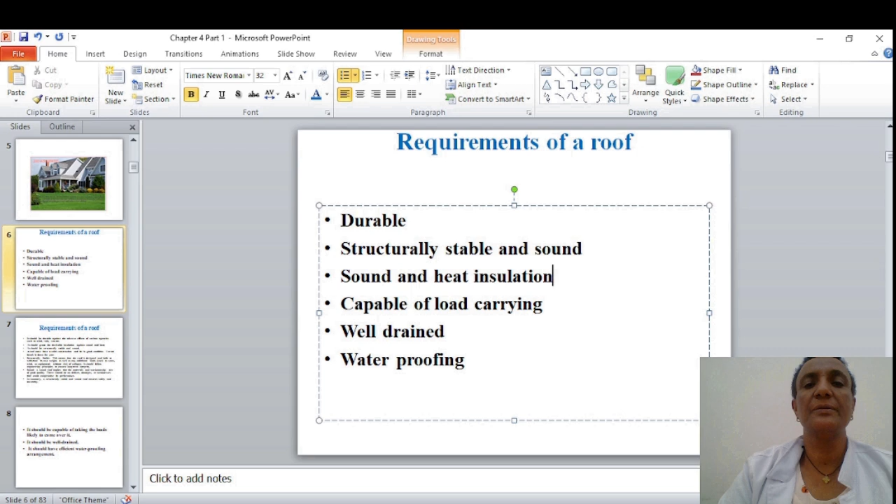Structurally stable means a roof is designed and built to withstand its own weight and other additional loads such as live loads, dead loads, and other loads. And it should follow engineering principles to ensure long life integrity. There should be no defect or weakness to compromise its performance. It ensures safety and durability.

Another requirement is sound and heat insulation. Sound and heat insulation plays an important role in roof construction, ensuring comfort, energy efficiency, and noise reduction. Let's explain in detail. Sound insulation. Sound insulation aims to control sound by blocking and interfering with sound waves.

Commonly used materials for sound insulation are first mineral wool. It is effective for both sound and thermal properties. The next is fiberglass, which is widely used and affordable. The third material is foam. It offers good sound absorption. Now we will see the benefits of sound insulation.

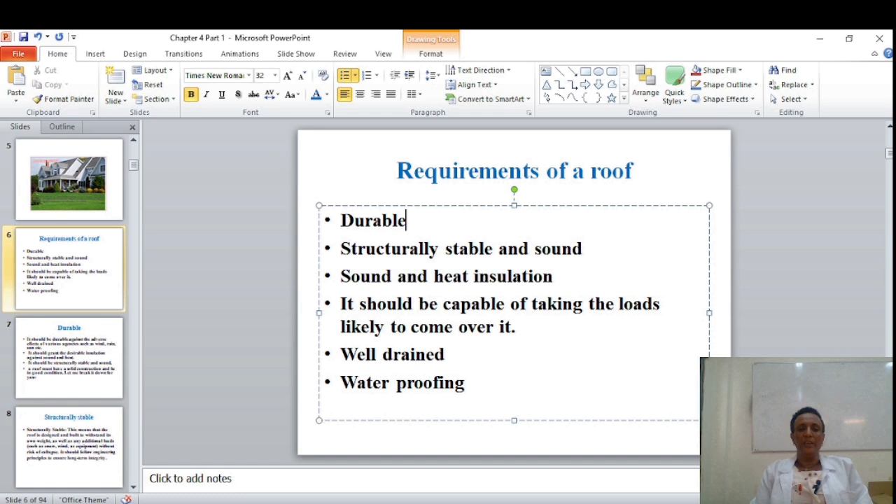Sound insulation reduces noise because insulation creates a barrier preventing sound transfer between spaces. And energy efficiency, because insulation also resists heat flow, keeping your home warm in winter and cool in summer. Now we will see heat insulation. Heat insulation prevents heat transfer between the interior and exterior of the building.

Commonly used materials are batt insulation, blown-in fiberglass or cellulose, spray foam insulation, and mineral wool, which also prevents sound. There is an installation process for these materials. First, install these materials in ceilings, roofs, and walls to maintain comfortable indoor temperature. Now we will see benefits of this heat insulation.

The first benefit is energy saving. It reduces the need for additional heating and cooling mechanisms. The next benefit is comfort: consistent indoor temperature all over the year. Remember, choosing the right material based on your needs and budget is necessary.

The next requirement is the roof should be capable of taking the loads acting on it. It refers to the structural capacity of the roof system to support various loadings. Let's explore different types of loadings that act on the roof. The first type of loading is dead load or self-weight. It represents the weight of all elements permanently acting on the structure. It includes roof materials, insulations, and structural components. It will be calculated by defining the density and the dimensions of the material. Example, purlin, insulation, and roof tiles.

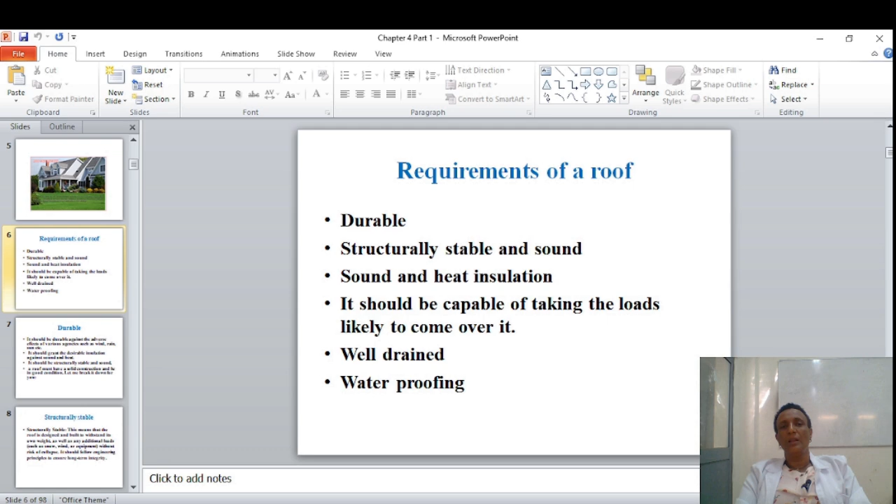The other criteria for roof design is wind load. Wind load is the force exerted by wind on the roof surface. It depends on local wind speed, for example. The speed of the wind depends upon different locations, so we have to study the speed of the wind because it affects the strength of the roof. And the building height is also another factor to be considered. When the building has many stories, the wind load acting on it has a large effect, and we have to study the height of the building.

And roof shapes also have effects on the roof design, because as we know, we can have different types of roof shapes, for example flat roof, curved roof, and sloped roof. So depending upon the shape, the wind load action will vary. So engineers calculate wind loads to ensure structural stability, because the building should be safe after finishing. And wind load analysis is an important aspect of structural engineering when designing a roof and other structures, because roofs are the top cover of the building.

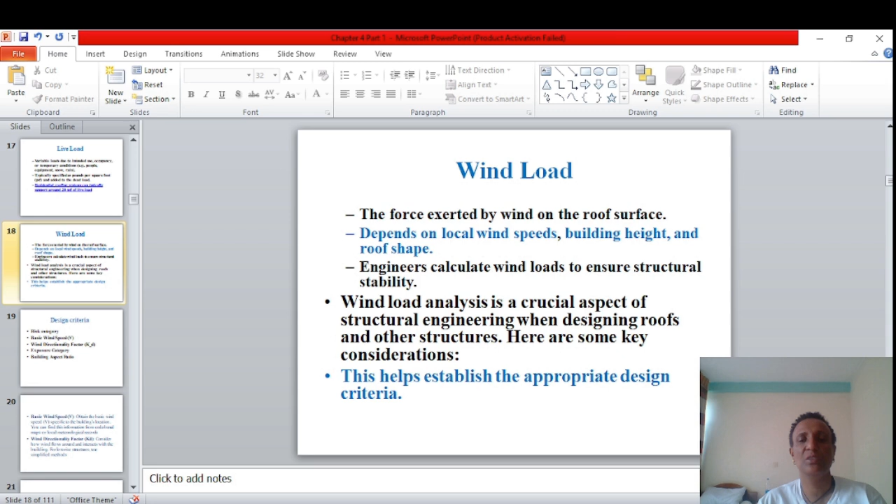It is exposed to wind loads and other external actions. So the roof should be stable and strong enough to carry this wind load. So there are different criteria to design roofs. The first criterion is basic wind speed.

The wind speed varies for different areas. It can be obtained the basic wind speed specific to the building's location. That means depending upon the location of the building, the wind speed will vary. So we have to know the location of the building and the wind speed on that location before designing the

roof. You can find this information from local meteorological records and from code-based maps. So after having this information, we can design for this wind load by using this information. Wind directionality factor is another criterion.

We have to study this criterion because we have to consider how wind flows around and interacts with the building. This is used to maintain the orientation of our building. That means the directions of openings. For example, the door of our building might be in the east direction or in the west direction. We have to determine this orientation depending upon the direction of the wind.

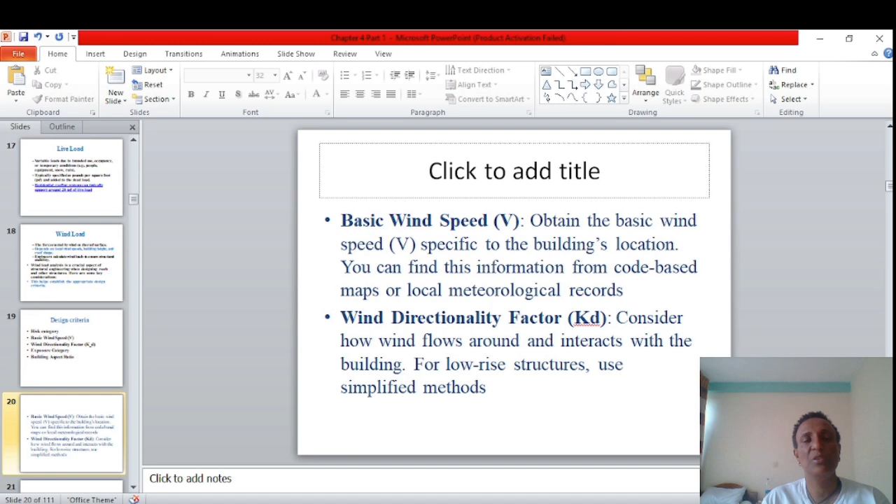So it is a very important factor. We have to know about this one. And also the height of the building, as I have said before, is a significant factor. For low-rise structures, use simplified design methods.

Exposure category is another criterion for designing roof structures. It determines the exposure category based on the ground surface topography, vegetation, and built structures. For example, if there is no other building around the specific building, we have to know about that location.

Exposure category is another criterion to design roof structures and frames. Determine the exposure category based on ground surface topography, vegetation, and built structures. That means if there is no other building around the specific building, the amount of wind load acting on that specific building will be large. So we have to consider these things during the design period of the roof structure.

Building aspect ratio is another requirement for design of roof structures. That is, the length to width ratio should be considered. The roof shape also should be considered. As we have seen before, there are different shapes: flat roof, curved roof, sloped roof, and different types of roofs have their own effect on wind load.

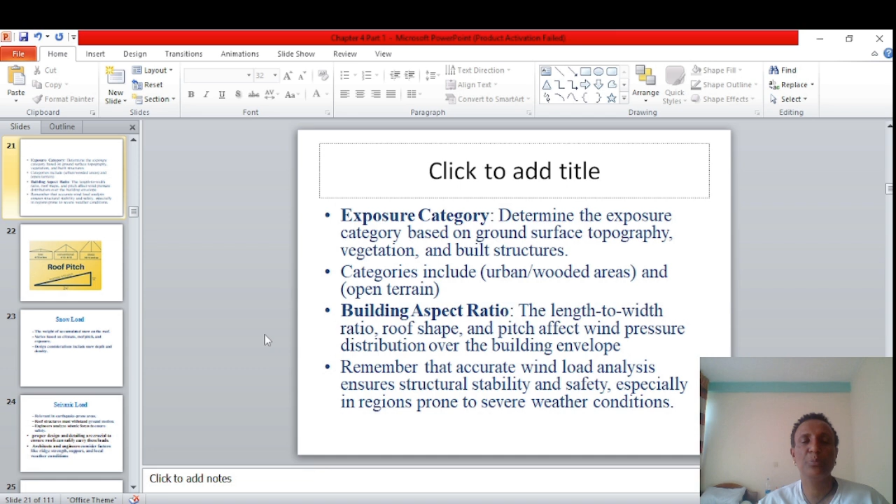So, accurate wind load analysis ensures structural stability and safety, especially in regions which are exposed to severe weather conditions. So we have to consider this building aspect ratio during the design period.

Snow load is another criterion to design roofs. Snow load is the weight or the force of accumulated snow on the roof. The roof can be exposed to this snow load because the snow can accumulate on the roof surface. It will vary based on climatic conditions.

For example, if the climate is very hot, the snow will melt immediately. So there is no chance of it accumulating on the roof. So the snow load will have no significant effect. But if the climate is very cold, there is a chance of snow accumulating on the roof for a long period of time.

Due to that weight of snow acting on the roof for a long period of time, the roof structure might be damaged. So we have to consider these things. And the roof pitch has a significant effect on this requirement.

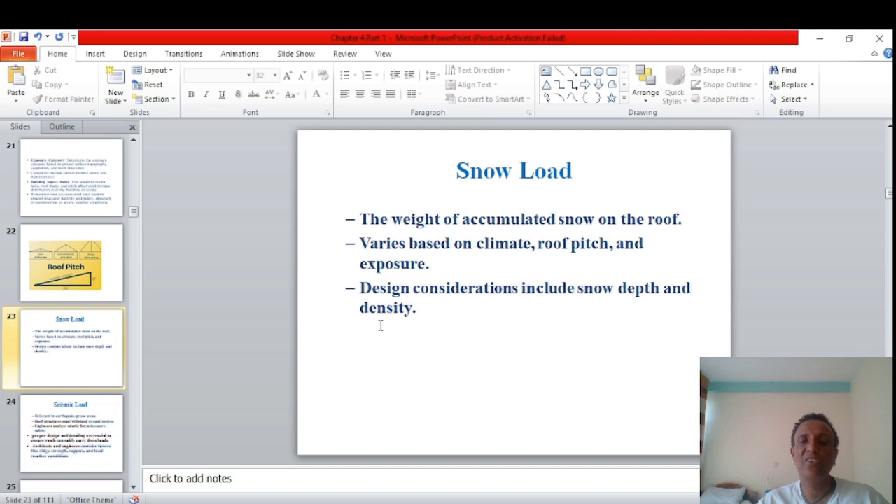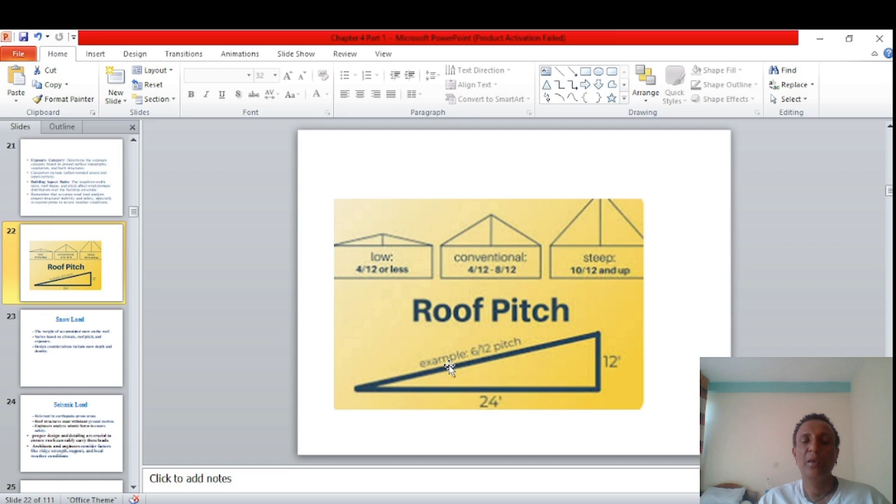For example, if the pitch is very small or if the roof is very flat, snow can accumulate on the roof surface for a longer period of time. If it is sloped, it will drain off immediately. So the weight of snow will not be a great problem on the roof structure.

Another consideration during roof design is seismic load. This is the loading which relates to earthquakes. Roof structures must withstand ground motion because during an earthquake, movement will occur in the structure. Due to that movement, the structural elements of the roof may crack or break. So we have to consider this earthquake loading.

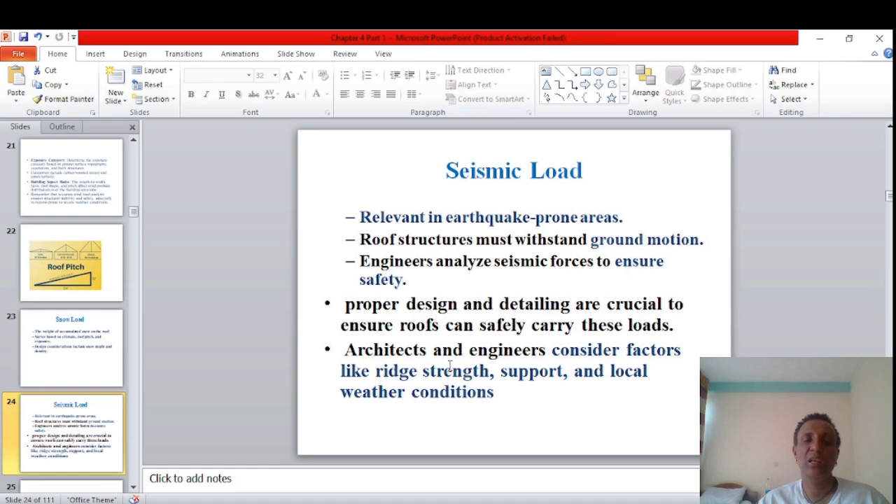Engineers analyze seismic forces to ensure safety of the structure or safety of the residents living in that building. Proper design and detailing are important to ensure the roof. Architects and engineers consider factors like ridge strength, support, and local weather conditions.

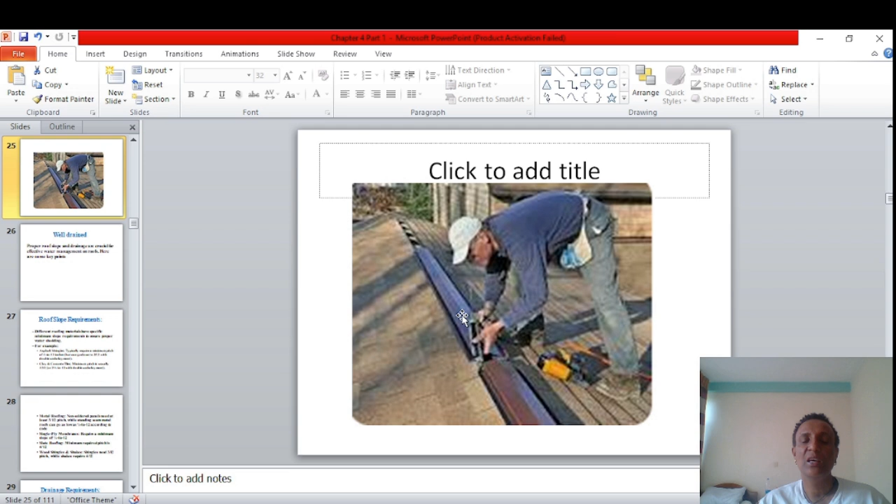This is the picture to show you how the ridge looks like. It is the uppermost element of the roof, so it is very exposed to the wind. So this ridge should be strong enough to carry wind loading. And the roof should be well drained. It can be achieved by providing proper roof slope and drainage for the roof.

This well draining requirement is very crucial for effective water management on roofs, because water is a problem for our building structures. If the water can enter into the building easily, dampness in the building will occur. Dampness is a very difficult problem in our buildings. We have to prevent that dampness, and the water should be drained quickly on the roof.

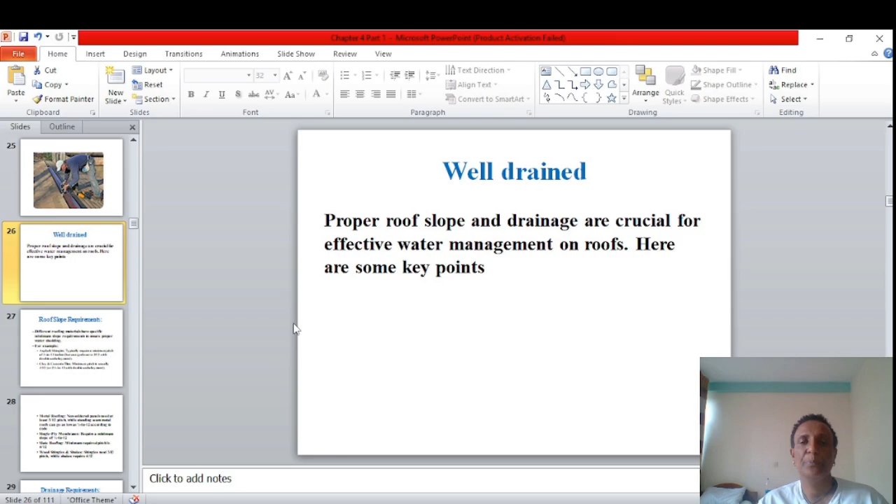Now we will see the common sources of roof leakages. The first source is cracks in the chimney. Cracks might occur in chimney construction because the chimney is constructed from brick and the roof covering is constructed from another material. So these two materials have different coefficients of expansion. Due to this different coefficient of expansion, the material will crack. So this chimney will be a source.

Cracks in roof membranes caused by settling rafters might be a source of leakages, because the materials used to construct rafters might be broken down or damaged. Due to this breakage, the roof membrane will lose its support. So these roof membranes will be cracked. Due to these cracks, water can easily enter into the structure.

The other cause of leakage is water backups from plugged valleys or gutters. These gutters might be blocked by moss accumulation or dirt inside the gutter, so the water can back up into the structure.

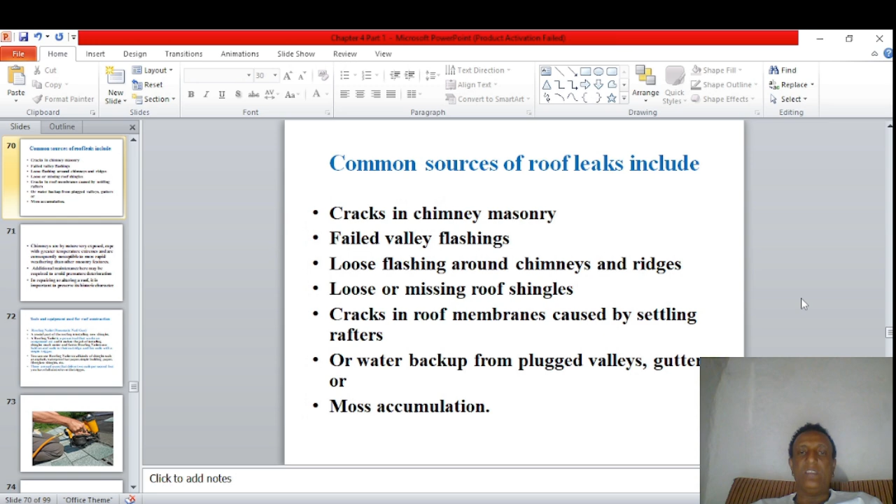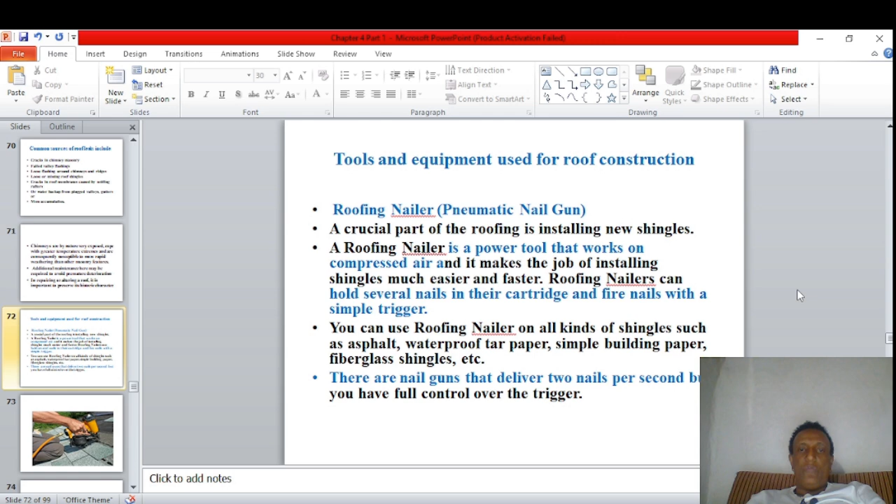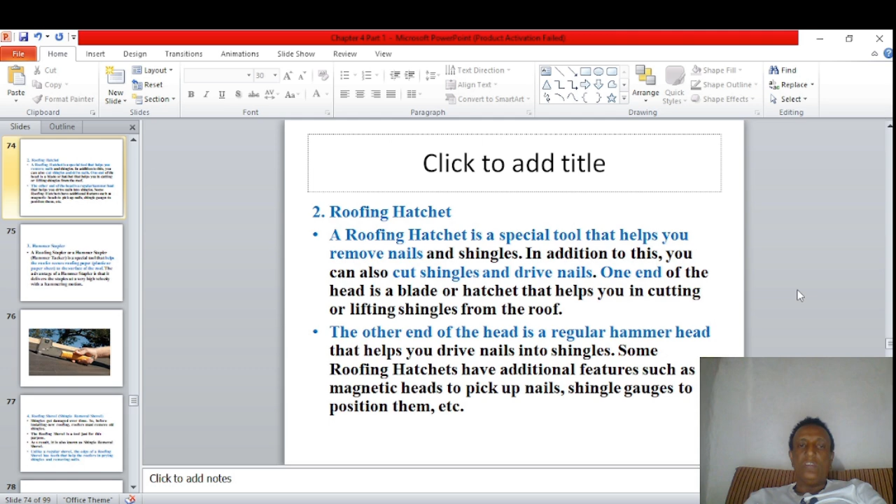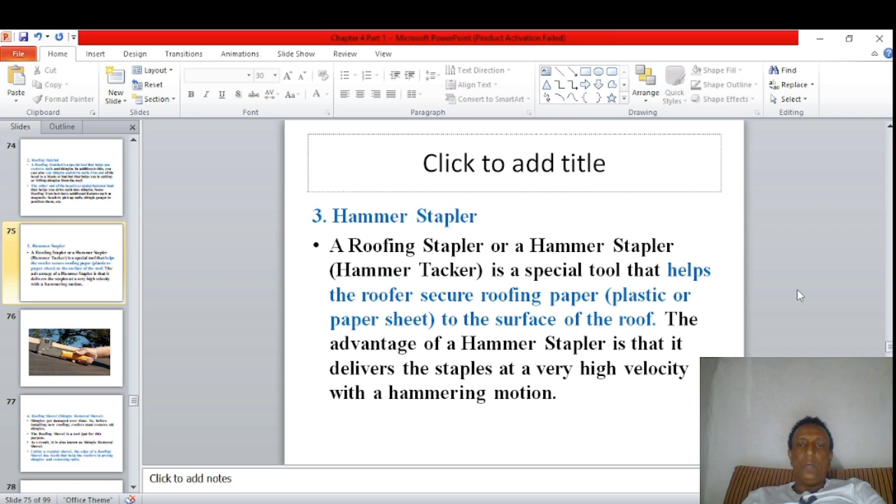The other tool is the roof hatchet. This is used to remove nails, cut roof covering materials, and drive nails. At one end there is a head, and on the other end there is a blade. So we can use this tool for roof construction. The other tool is the hammer stapler. It is used to secure roof covering materials to the surface of the roof. This is the picture of this hammer stapler.

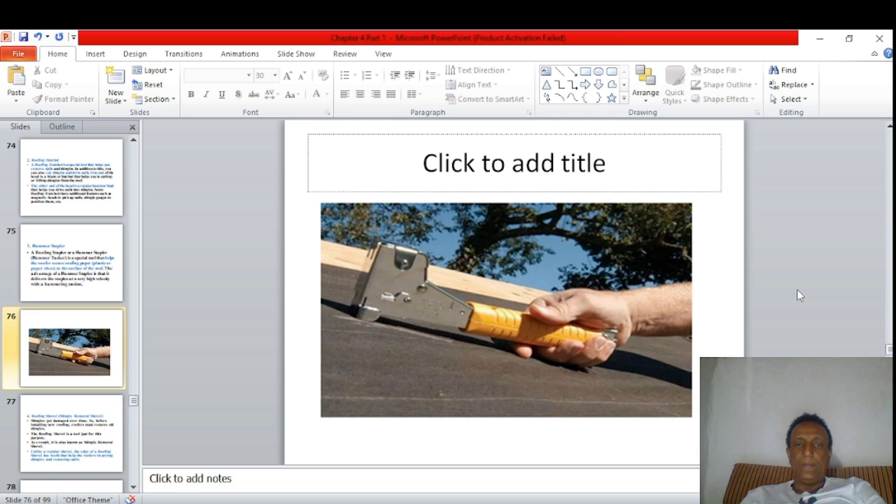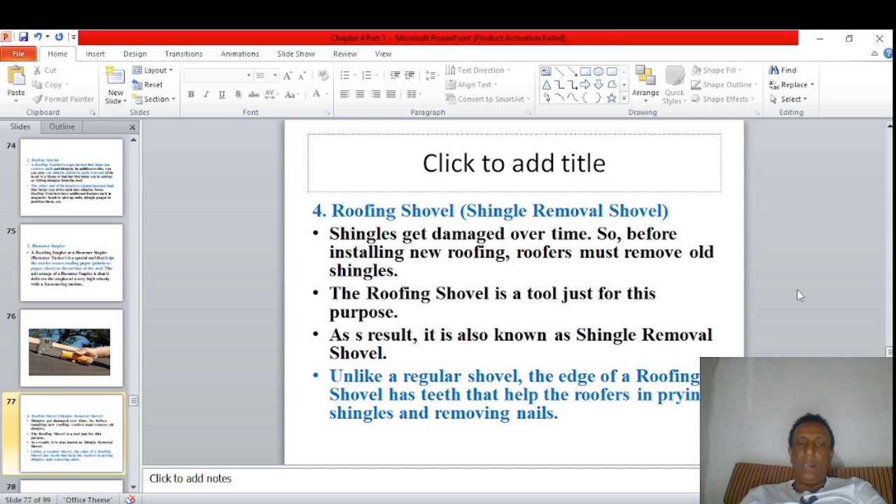And the roof shovel is another tool used for roof construction. This shovel has teeth, unlike other regular shovels. It is used to remove roof covering materials from the roof.

The other tool is the drill. It is a very useful tool to make holes, and it is used to drive fasteners. Access to electricity on top of the roof is very difficult, so it is advisable to use a cordless drill for this purpose. The problem with this cordless drill is the battery life, so you have to have a spare battery to replace and use.

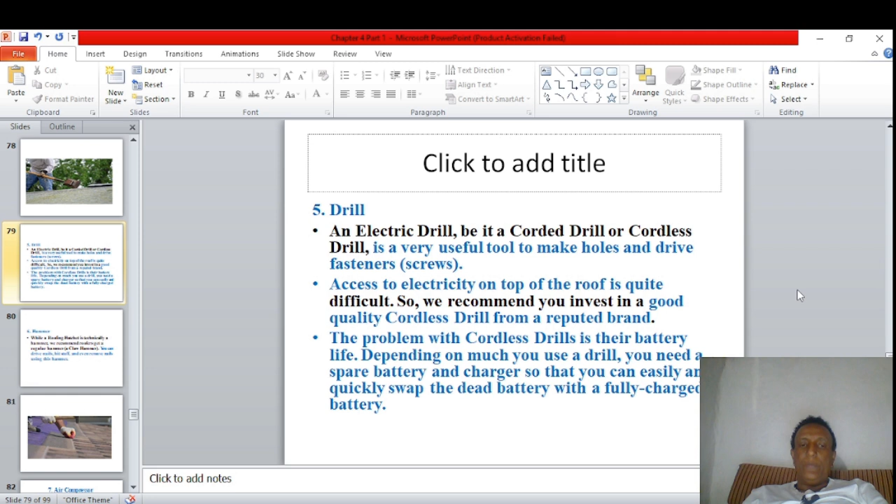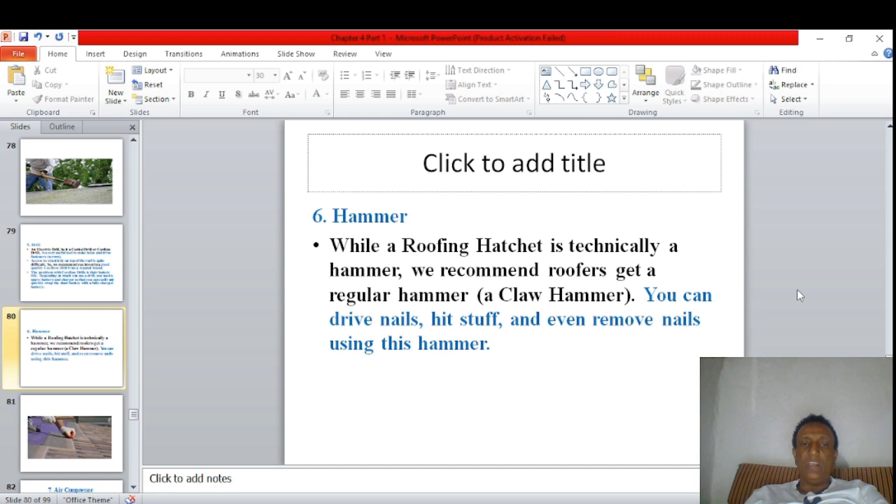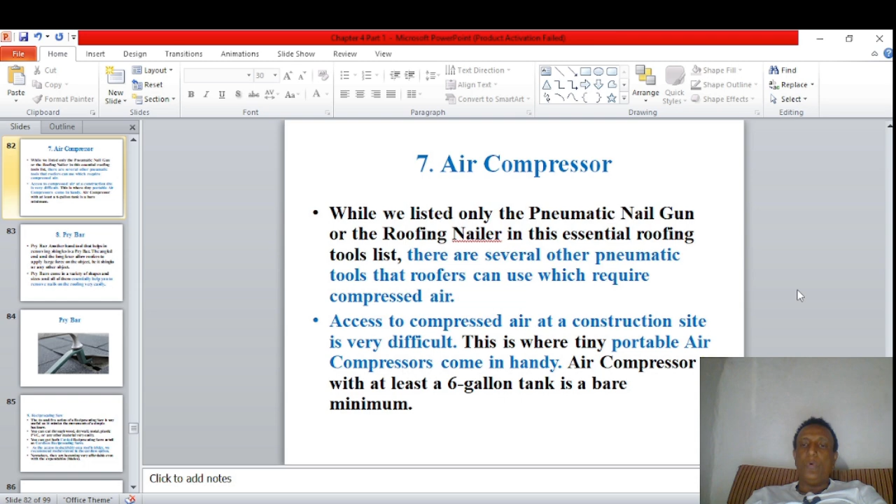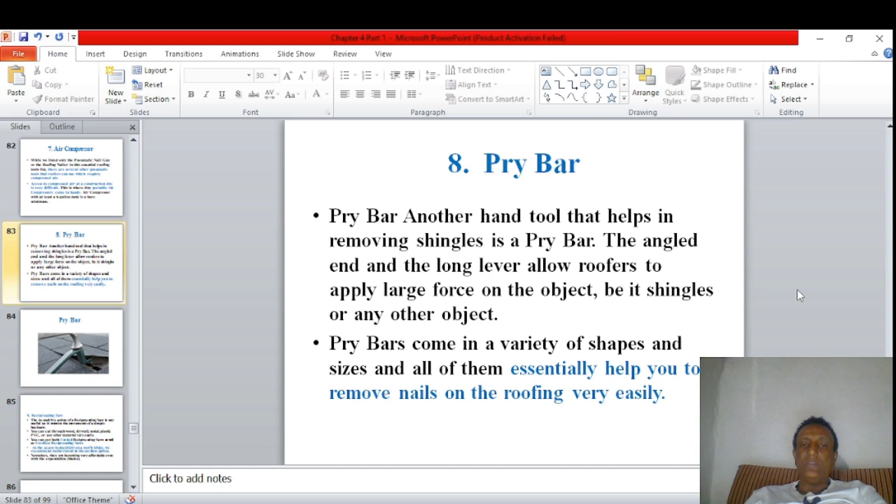And another tool is the pry bar. It is essential to remove nails on the roofing very easily. And this is the picture of the pry bar. Saw is another tool. Corded and cordless saws are available in the market, so you can use any one of them.

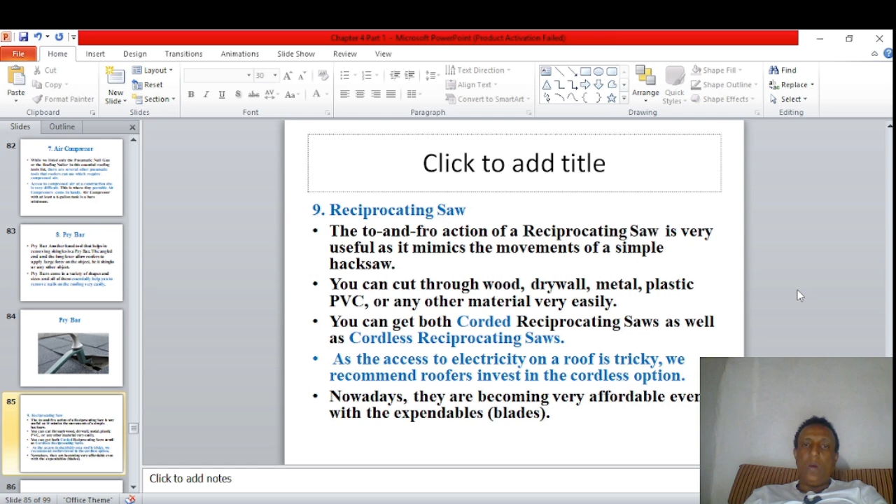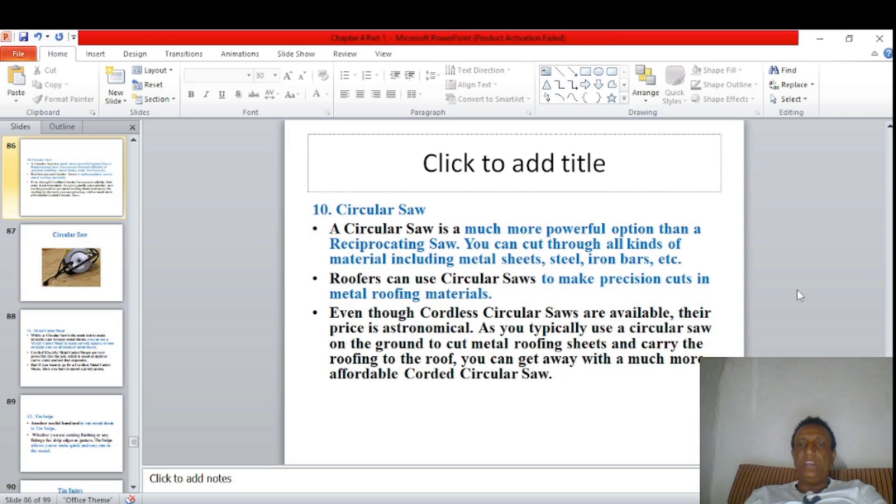Circular saw is another tool used for roof construction. It is a much more powerful option than other types of saw. You can cut all kinds of materials, including metal sheets, steel, iron bars, and other elements. It is used to make precision cuts in metal roofing materials. This is a picture of a circular saw.